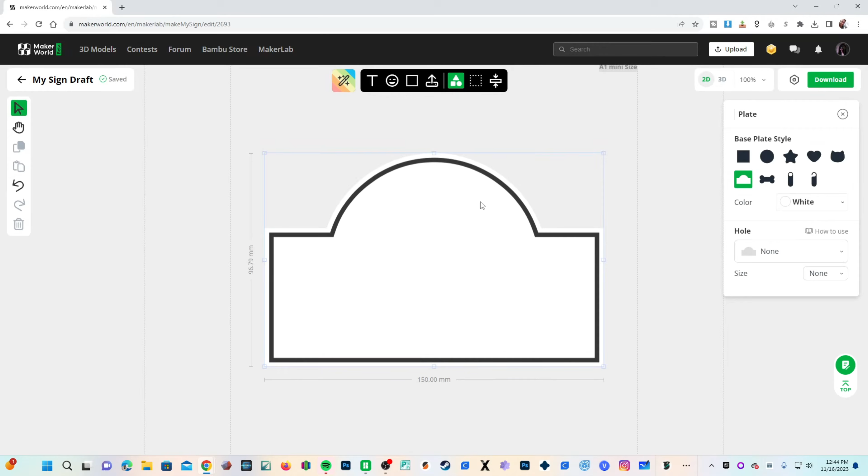On the right, under plates, you will see you can change this to a circle, a star, a heart, a kitty cat, whatever this is, a bone, and 2 door hangers. This thing reminds me of a motel or hotel where there should be like a sign here with the sun and it says like free breakfast or free Wi-Fi. Yes, we have cable. Let's go ahead and create a rectangular sign.

You are presented with some other basic tools such as the ability to change the color. Keeping in mind, you will be choosing the color in your slicer. I will set mine to white, the corner radius at 10, but you could change it to make it rounder or more square. Moving down, we have hole options.

This is very cool. What good is a sign if there's no way to hang it? Gone are the days of having to create your own holes. You simply click on a pull-down menu and choose from the type of hole you'd like: inside the plate, on the boundary, or on the back.

Choosing, for example, double top, we'll put 2 holes inside the plate. Choosing double top under on the boundary, we'll place 2 holes on top of tabs outside the boundary of the sign so that the holes do not interfere with the sign's design at all. And the final option is on the back, where you can choose again double top. Bambu says this plate is too thin for backward holes and you need this plate to be thicker.

It recommends 3 millimeters or above and presents you with a Make It Thicker button. I will go ahead and click Make It Thicker, and it's been automatically changed to 3 millimeter. Now we have a slot for hanging placed on the back of the sign.

I'm going to go ahead and choose double top inside the plate. You can choose the size of your hole. They only offer 2 options, 5 millimeter and 10 millimeter. I'm not really sure why we can't get a sliding scale here, but I'm going to choose 10 millimeter. I do like to hang things on push pins, and 10 millimeter will definitely be enough for that.

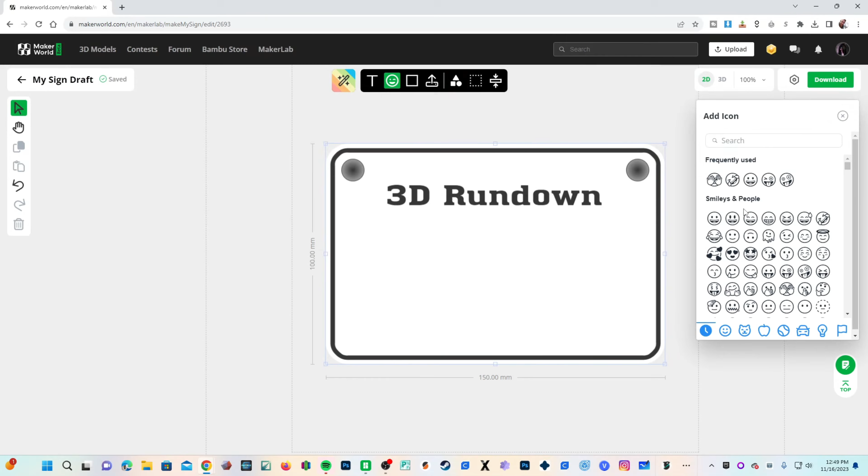Let's go ahead and throw some emojis down, for example, maybe the laughing emoji, the tongue out emoji, the crazy emoji, stars in the eyes emoji. I do think these emojis look a little bit small, so I'll make them bigger just to be sure the printer has an okay time printing them. Notice when choosing your text size, it does recommend a 0.2 nozzle for 20 and 24 font size.

Now that we have our emojis and our plate and our holes, let's add an SVG file. Right here is the import SVG option. Click on that, and I'm going to go ahead and drag in an SVG Bambu logo that I downloaded from Printables.

And there you go. It's just a tad big, so we'll shrink it down. How about we stick it right here? Let's get this nice and fat to be sure it prints in good quality. Move our emojis around a little bit.

And there you have it. We have created a 3D printable sign in about 5 minutes using Make My Sign in Bambu Lab's MakerWorld MakerLAB. That's an awful lot of Maker.

Now that it's done, we can go ahead and export this to an STL or 3MF file. I will choose an STL file. You will see it downloaded as mysigndraft.stl.

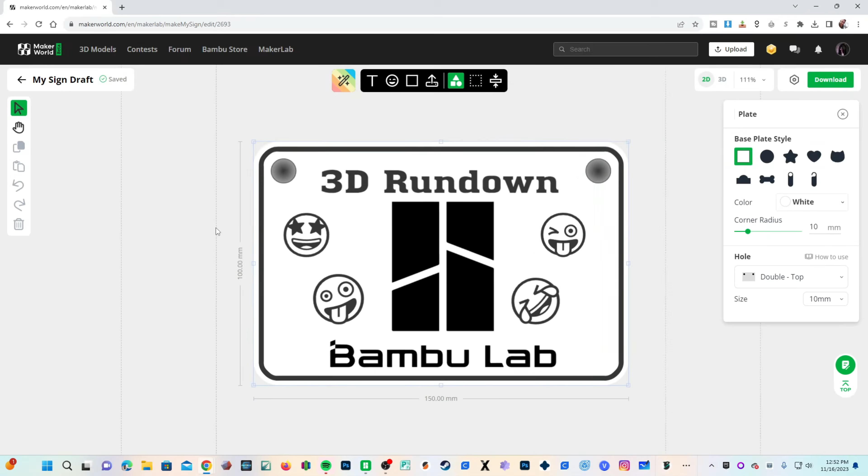While we are here, I'd like to point out one interesting feature, and that is the fact that this sign is actually fitting on your Bambu Lab printer's bed. If you scroll down with your mouse wheel, you will see the outline of the A1 mini bed. If you scroll down more, you will see the outline of the X1 and the P1 bed.

This will give you a rough idea of how it fits on that bed and the actual size of this model. You can turn that off by clicking on the gear and unchecking Show Plate Reference. Of course, you can also change millimeter to centimeter and metric to imperial for all you monsters out there. Clicking Show Plate Reference again will bring back those plates.

You can see that the default size for this sign is 100 by 150. You can simply grab the corner here to make it bigger or smaller. Oops, I've messed it up. Hold Control Z and it will in fact back you up.

Now that we are done with our sign, we can click the back arrow to return to MakerLAB. You will see that it is saved as My Sign Draft. At the time of this recording, I was unable to figure out how to rename this sign.

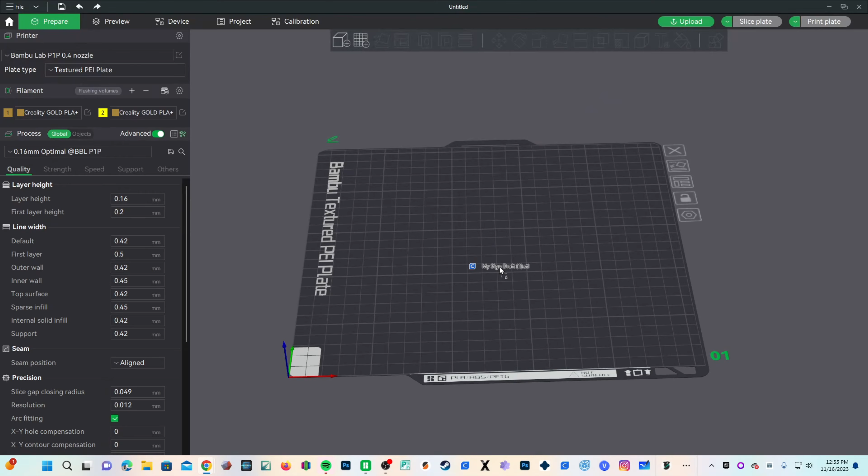Let's go ahead and drag it into Bambu Studio. So here I am in Bambu Studio, and I'm going to drag mysigndraft.stl onto the bed. I am working with a Bambu Lab P1P with an AMS system, and my base filament color will be white.

I do find it interesting that a file created by Bambu itself is being reported as non-manifold edges and being asked to repair. I will go ahead and repair. As you can see, all of the text, SVG, and other shapes and emojis are raised. This allows us to use Bambu Lab painting.

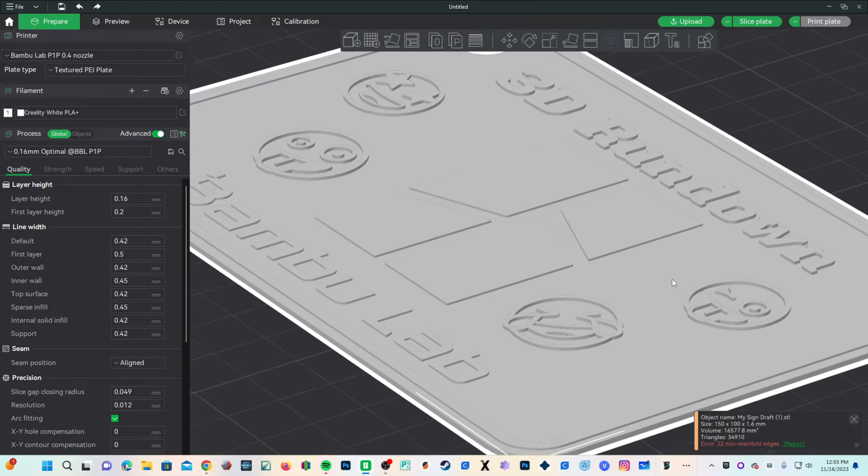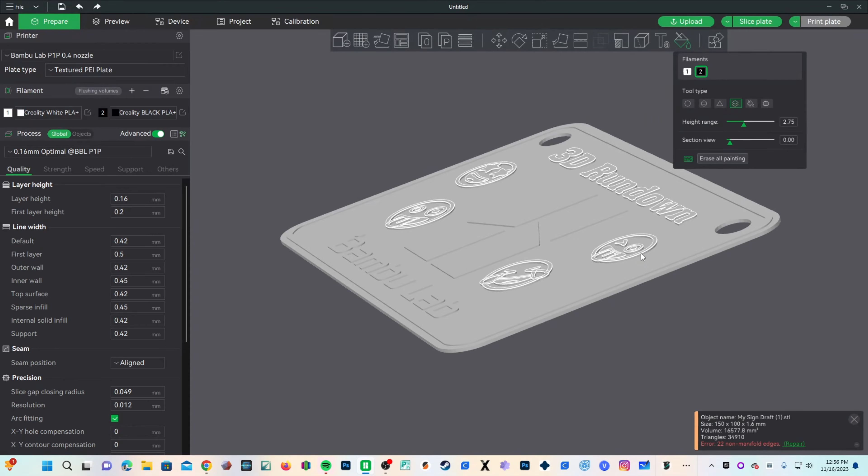Let's go ahead and add another filament. I'm going to add black, and we'll enter the painting tool. From here, you can simply use fill to fill the tops of each shape, or if you are lazy, use height range, make the height range large, go to the very tippy top layers of the model till it's all highlighted, click, and everything from that range up will now be black.

And there you go. We've made a multi-material sign using Bambu Lab's Make My Sign in just a few minutes. As quick and easy as this was, it just doesn't look right to me because the Bambu Lab logo is green. So let's go ahead and add green filament to the list and paint that logo in green.

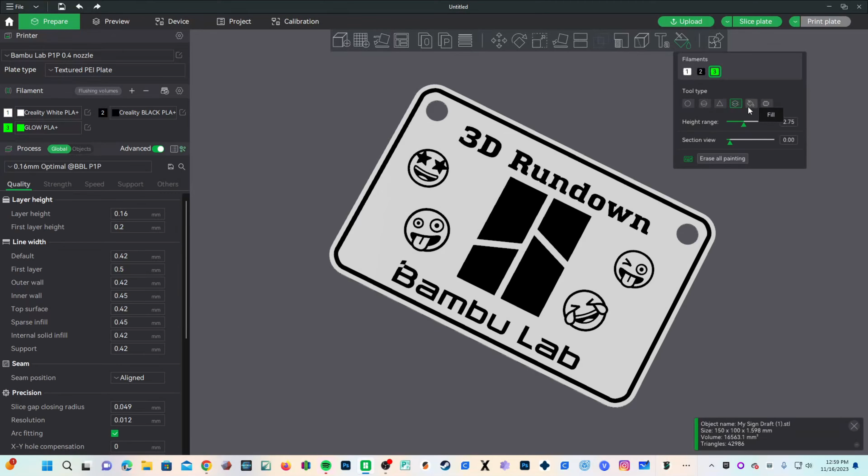I'm going to use fill and simply green the top right there. And this little notch right here is supposed to be green also. We will zoom way in here and choose triangle. That way we can avoid accidentally spilling color off of this little tab on the logo.

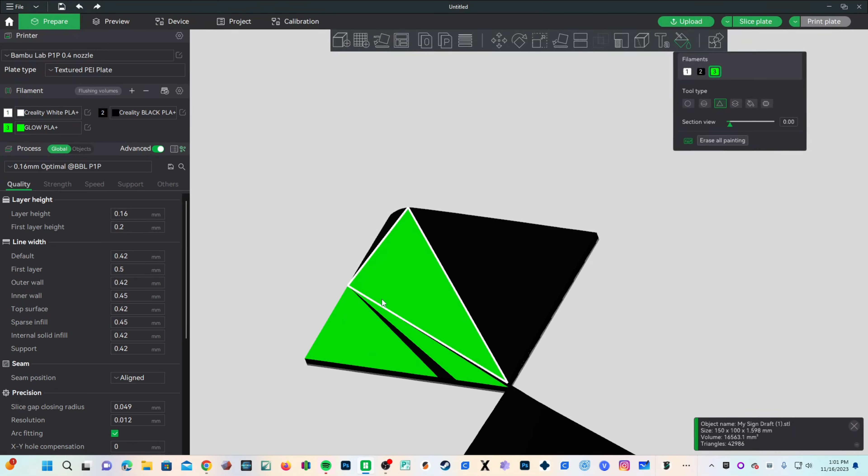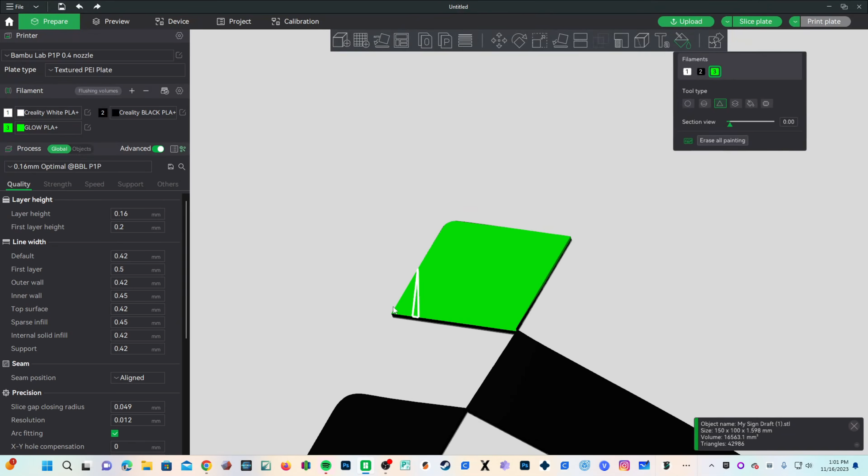You can simply hold your mouse button down and just move it gently around the surface of the model you are trying to triangular paint. When you get down to the nitty-gritty, just be real careful. Fill those little spots in without going overboard and slipping off the model. And there you go. We now have a green tab on the Bambu logo.

Now that we've created our fancy new sign, we need to go ahead and slice it. I didn't see any suggestions on MakerWorld, so we will do our own. I am not a big fan of printing quickly, so I'm going to bring things down just to be sure that I have a successful print.

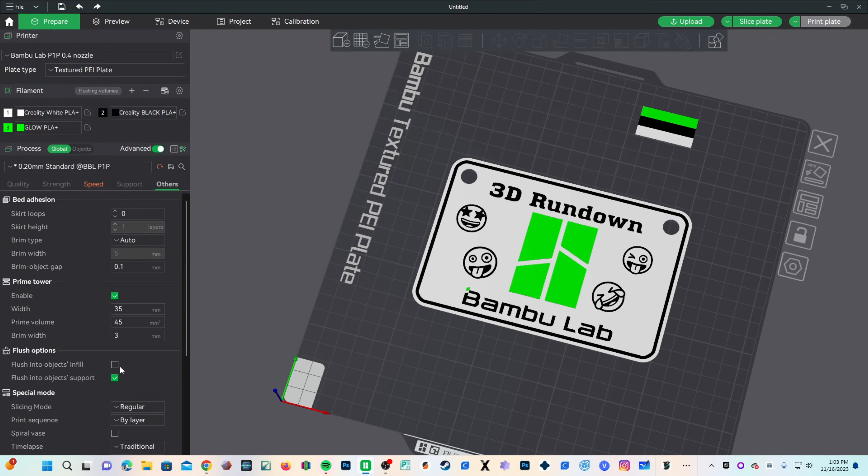I'm going to slow that first layer down a touch. We're going to look at strength. I don't know how many walls or infill it suggests for such a thin model. We will leave it as is. Obviously no supports. Because there are no supports and little to no infill, flushing into supports and infill won't be much help here. We will need that prime tower. Let's go ahead and press slice.

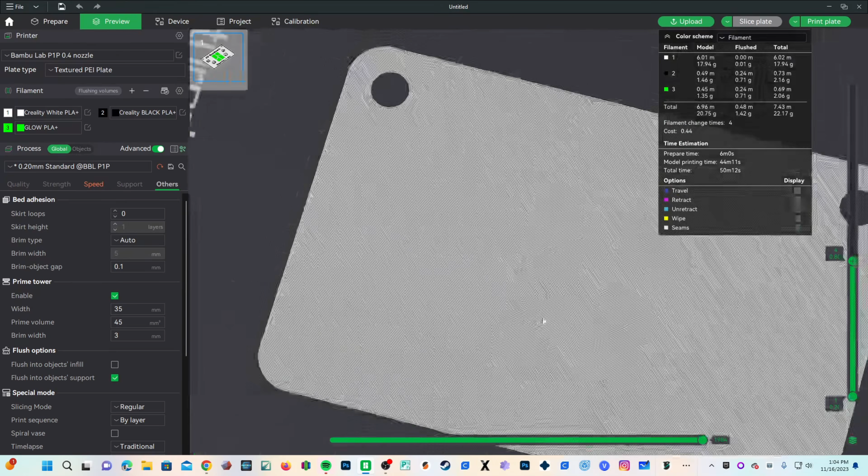And here she is. We can have a peek at this print. You'll see there's almost no infill whatsoever, just some right here on the Bambu logo itself. It's mostly just a couple of thin layers and 4 color swaps for a total print time of 50 minutes. I'm sure there are options you can change to create a better top layer, but we are going to keep things simple and go ahead and print it as it is.

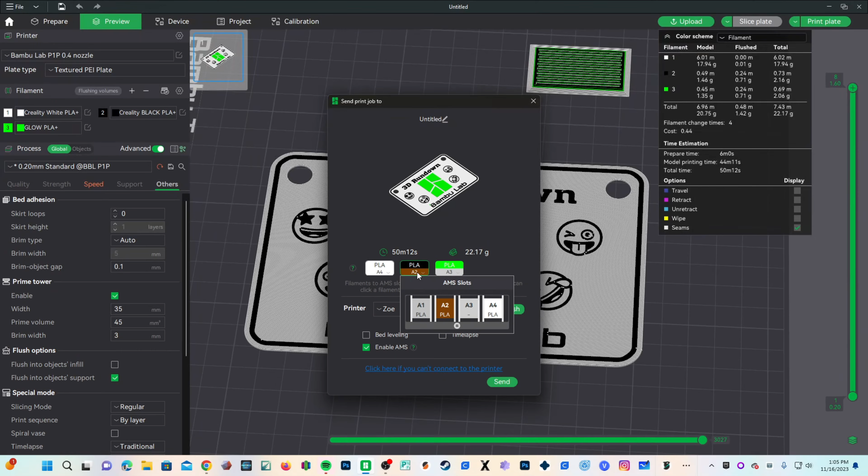Click on Print Plate, assign your colors, and send it off to your printer.

Because this is a very thin 3D model, I don't suggest attempting to flex it off the bed immediately while it's still hot and potentially soft and pliable. Wait until the model cools so it's nice and stiff, and then flex the bed to remove it more easily without warping the model.

And now to make use of the hanging holes. I will take this sign, place it against my wall, stick one push pin, and stick another push pin.

And there it is, our very own designed, printed and hung 3D printed sign from Bambu Lab, MakerWorld's Make My Sign.